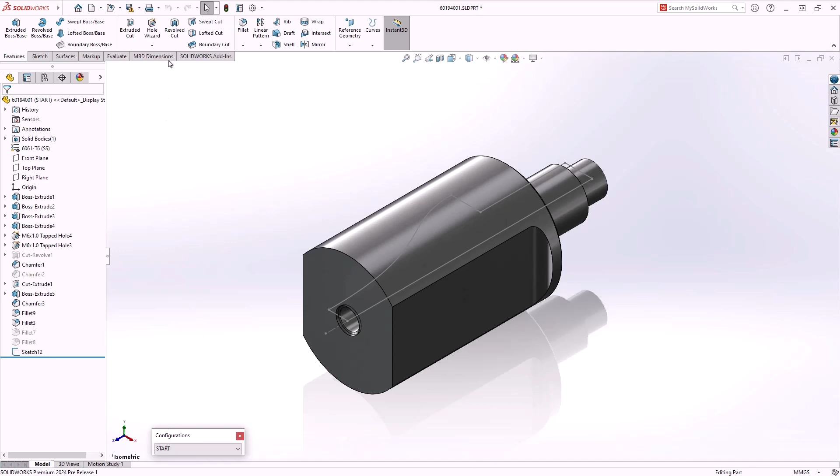Next up in SOLIDWORKS 2024 is a new option in the revolved cut command. We now have the ability to flip side to cut, just like we do in the extrude cut command. Normally this cut would core out the interior of this component, but with the flip side to cut, it cuts the exterior, giving you a lot more flexibility with your designs.

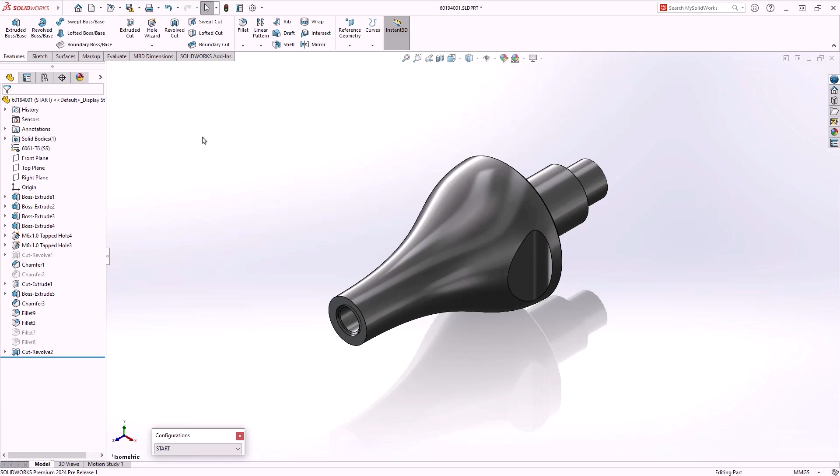On a part like this, we might need to know the sort of bar stock required for manufacturing. So to do that, I'll go to Reference Geometry and choose Bounding Box. Now in the past we've had rectangular bounding boxes, but we now have the option to use cylindrical.

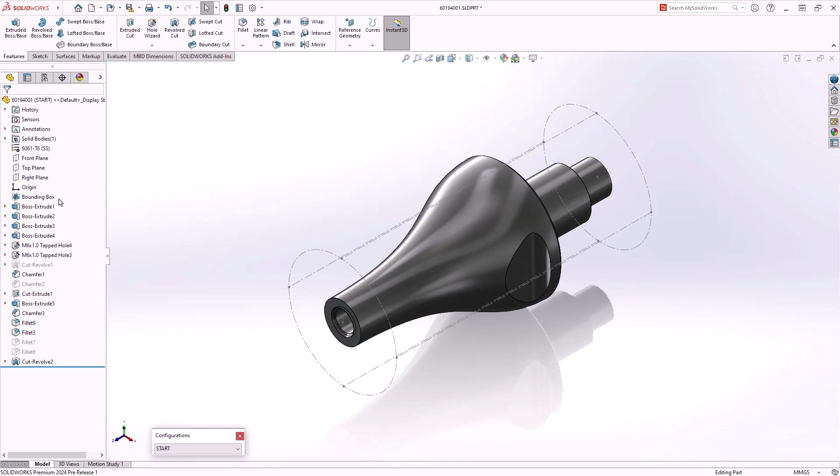Currently this best fit option is based off of the rectangular option, and so it doesn't give us the best fit that we're expecting for this particular component. But that's not a problem, because we can choose a custom plane and specify the direction that we like for this particular bounding box. Right click and we'll confirm that, and you can see this bounding box here. A great way to add useful manufacturing information to your model.

Let's continue on with some patterning and surfacing enhancements. We'll select this component and open it. We have an idea for lightening this component using these triangular cutouts, but of course we need to first pattern them. I'll start by selecting the front plane to give them my pattern direction and then choose linear pattern.

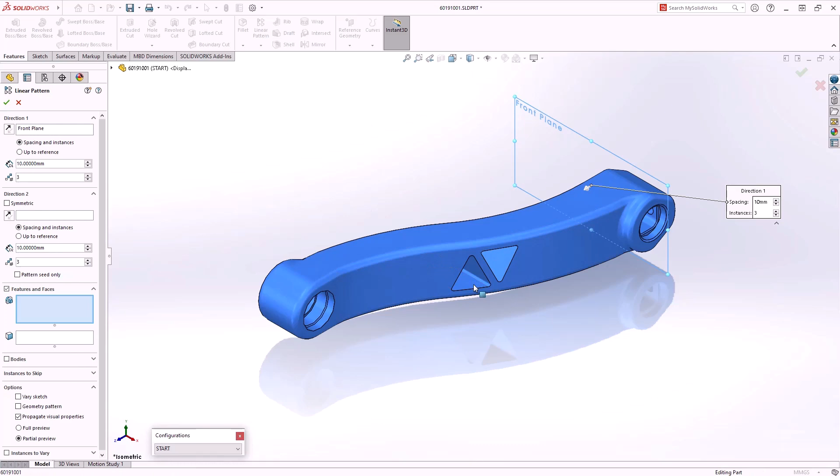At this point we want to select the interior face of that cut and then go to the right view so we can see what it looks like. Let's use a dimension of 22.5 and 3 instances.

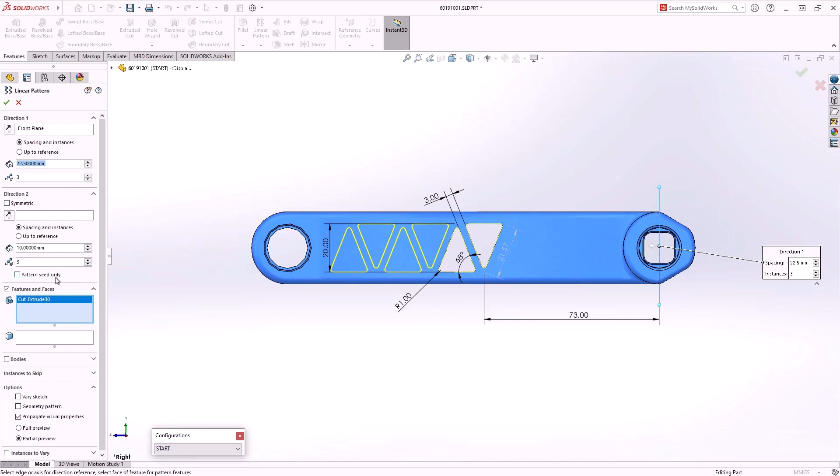New in 2024 is the option for symmetric linear pattern, so we no longer have to use this pattern seed and specify the exact same options in both fields. We can simply use symmetric patterning, and as you can see the pattern is now symmetric. A bit of a time saver if you are using patterns often.

Next, let's have a look at an improvement in surfacing. We have a new option in the Untrim Surface tool, but first we need to do a copy surface, so I'll use the Offset Surface command. Using the down arrow, I will set that to 0 and select this face and click to confirm. Now I have a copy of that surface.

This part is probably going to be injection molded, and we might want to be able to capture these shut-off surfaces for these triangles that go through the whole part. Previously this was relatively difficult, but now in SOLIDWORKS 2024, simply just using the Untrim Surface option and specifying Exclude Parent Surface, it will now give me those interior faces.

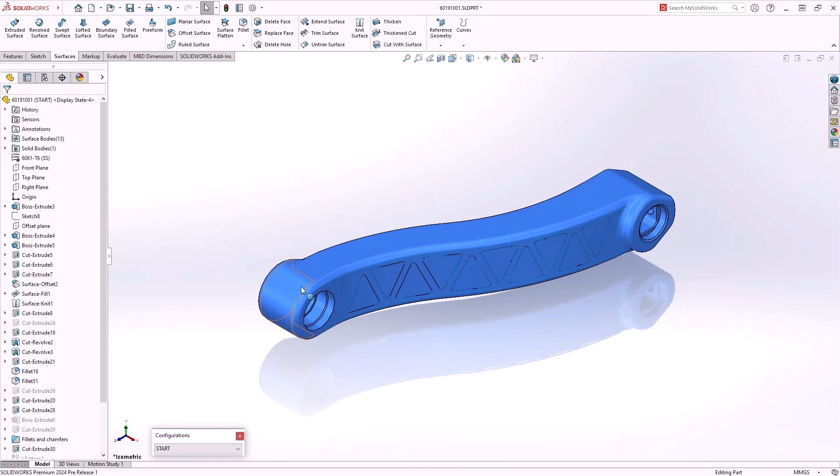I can hover over the component, use Tab to hide the solid body and the surface body, and we can see that I only have the shut-off surfaces that I require.

Let's take a look at some enhancements to sketching as well as the hole wizard. Selecting this component and opening it, let's modify this sketch and add some detail to it. What I want to show here is just a quick sketch addition. Just adding this rectangle, and then I'll simply select one of the lines.

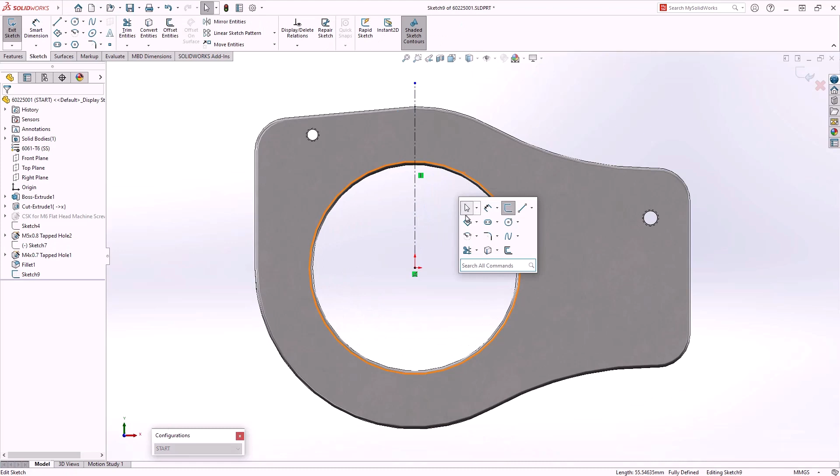As I select it, you'll notice that there is a grey dimension popped up, which I can select and type in a dimension. Very quick and easy. It doesn't only work for individual entities, you can also select multiples.

Let's select the center line, then Control select this line here, and now I have an angle dimension between these two, but it doesn't interfere with any of the previous existing sketch options, such as the pop-up in context toolbar where I can add an equals relation.

A great new option there for dimension preview.

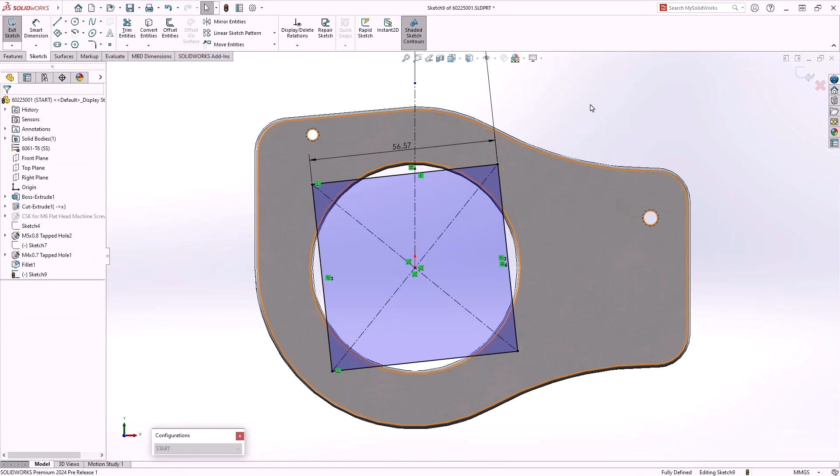Now let's take a look at an update in Hole Wizard. New in 2024 is the ability to use an existing 2D sketch for the placement of holes. Once we've selected the hole type, selecting this option allows me to select the sketch, and you'll notice that it doesn't only allow sketch points, but allows the endpoints of lines as well.

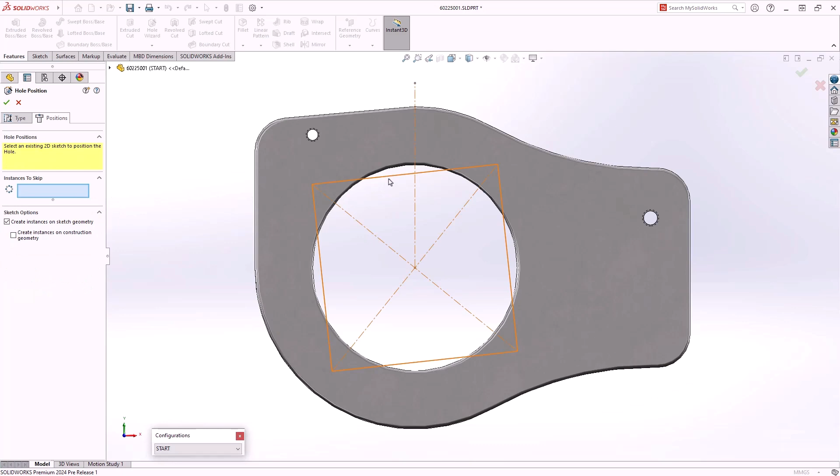I can choose to create instances on construction geometry or uncheck the new option completely. Let's leave it on for now, but in this case I only needed 3 bolt holes for this pattern. So let's choose another new option, instances to skip. Just deselect that particular instance and then confirm.

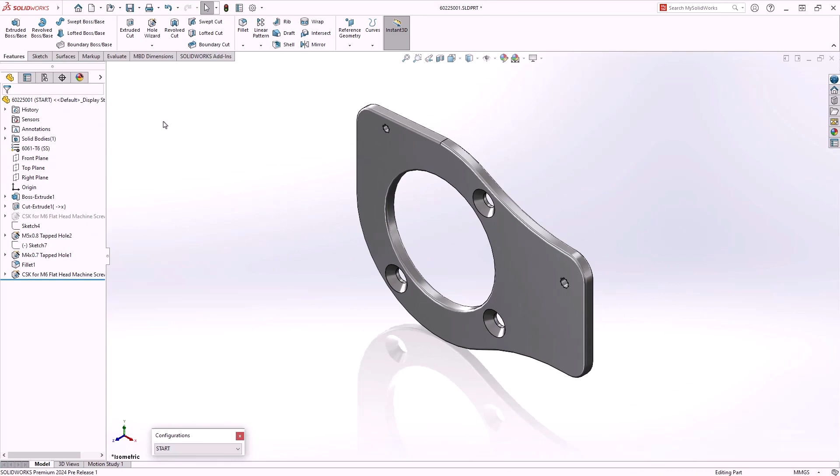Finally, let's talk about another enhancement to SOLIDWORKS 2024, which is the ability to make a multi-body part out of an assembly. In this example, we need to be able to create a fixture or jig for welding this assembly together. But because this assembly is weight sensitive, we also want to have a really precise understanding of the final weight and whether there are going to be any interferences between any of the welds and the jig or fixture.

Historically, we could do some of this inside the assembly, but we can't do an actual physical body weld with a fillet bead at assembly level, although we could do some assembly features like cuts. So we wouldn't be able to get the actual true weight of the completed welded assembly. It's also not as easy to create jigs in this mode either.

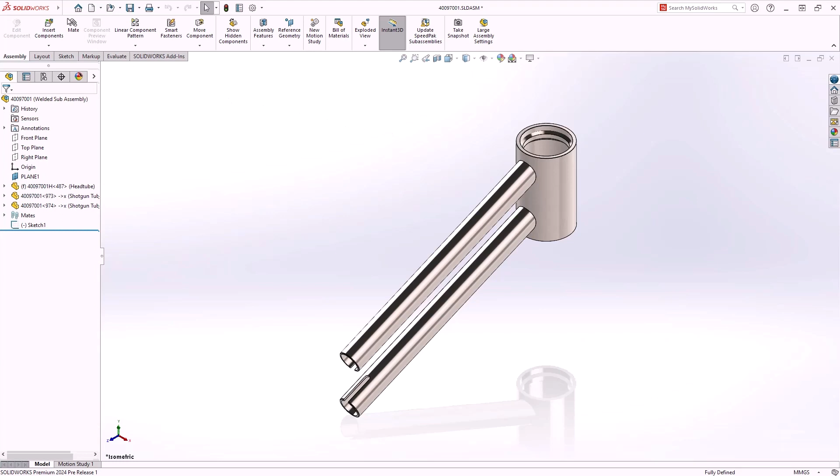Optionally, we could save this assembly as a part, but that breaks the connection to the assembly and also just creates imported geometry. So in 2024, we have an option to make a multi-body part. With this new option, we can carry over information like surface and solid bodies, as well as axes, planes and coordinate systems for the assembly and the part material.

You can choose to break the link to the original assembly if you like, or maintain it. Now that we've saved the multi-body part, we can start creating our jig or fixture, but before we do that, let's look at the feature tree.

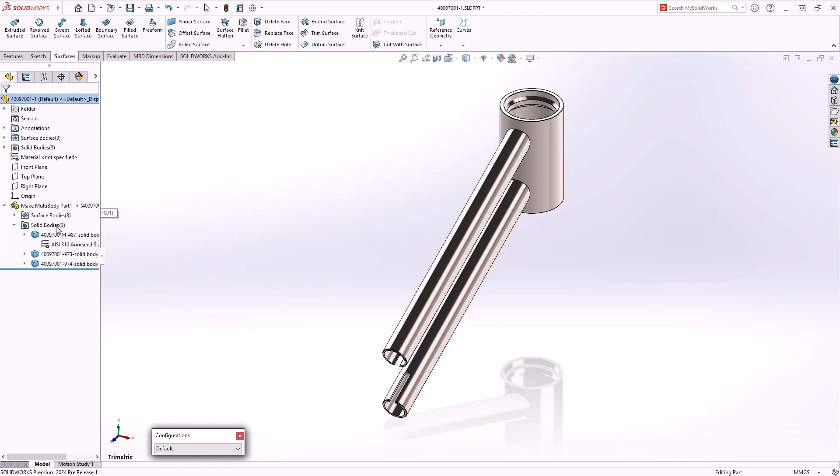On our Make Multibody part, you can see that we have surface bodies and solid bodies brought across, and each of them has their own material shown here in the tree. Let's show the surface bodies and hide the solid bodies. We'll just trim these surfaces using a mutual trim and then thicken the surface. Let's go with 3mm thickness.

I'll just show all the bodies and show the fixture, just to highlight that this is in fact associative. I can move the assembly around here and update the new part to see that not only does the part update, but also the fixture around it.

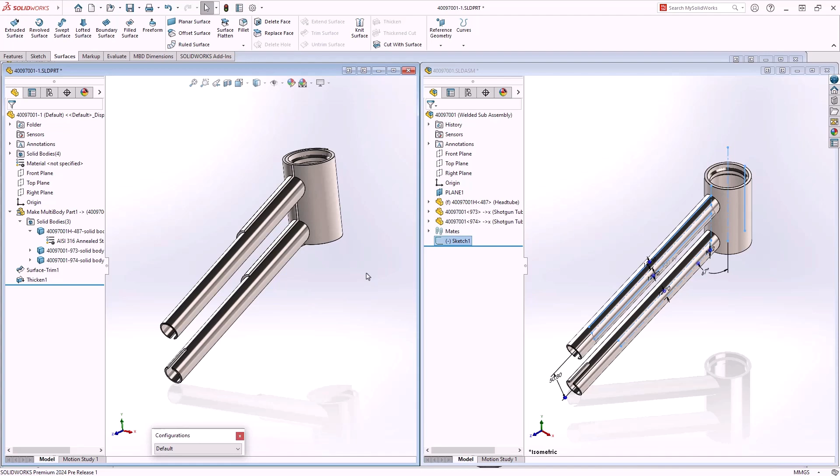Another ability we have in the part environment is that we can create material rather than just removing it. So if I wanted to do a fillet bead, we can do that. Just select one face, right mouse button to move the face set selection over to the second one, and then select the second face set and right click to confirm. Enter will repeat the last command and just repeat the steps.

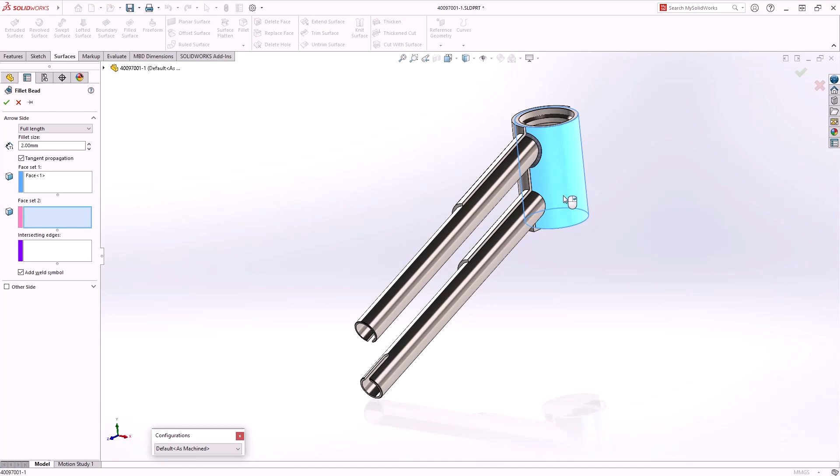Because those are actual solid bodies, we can see them in the cut list folder. We can even apply material to them, again making sure that we have a very accurate weight for our assembly.

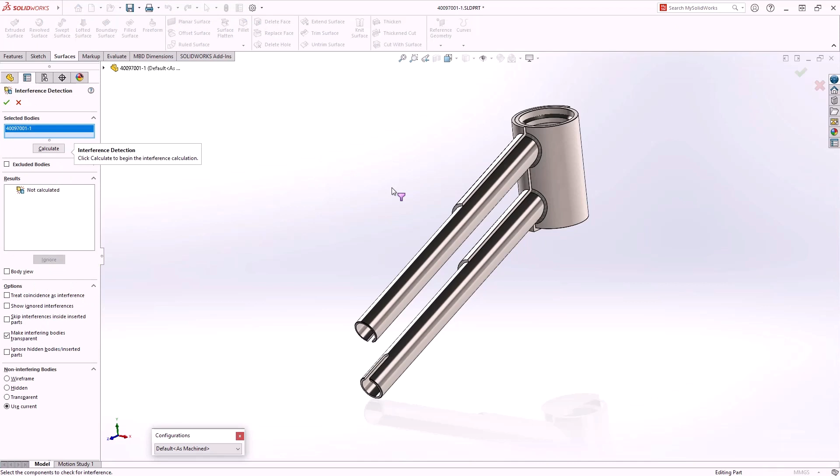Something else that we might want to do is try an interference detection, which we are able to do in part environment as well. We know that we're going to have an interference between the fixture and the weld bead that we just applied, but that doesn't matter too much as we can quickly solve the issue.

Just hide these bodies and then we can add a chamfer to this edge. A 2.5mm 33° chamfer should be enough clearance. Let's show our components again and we'll run that interference detection one more time.

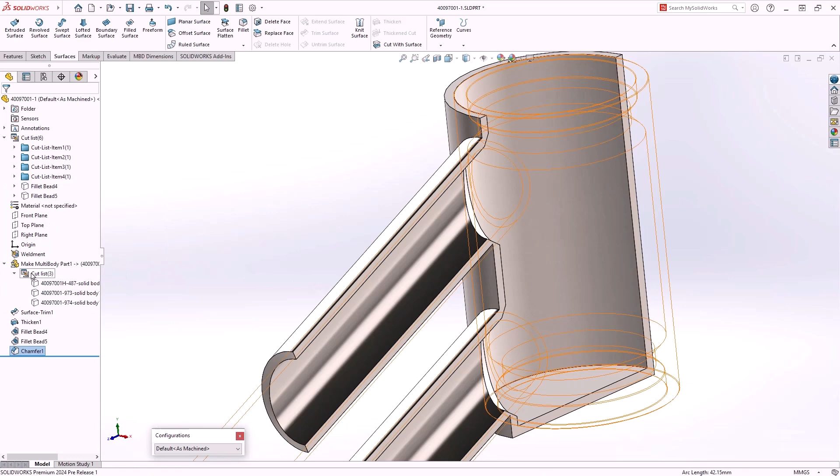No interferences. A great new option for SOLIDWORKS 2024.

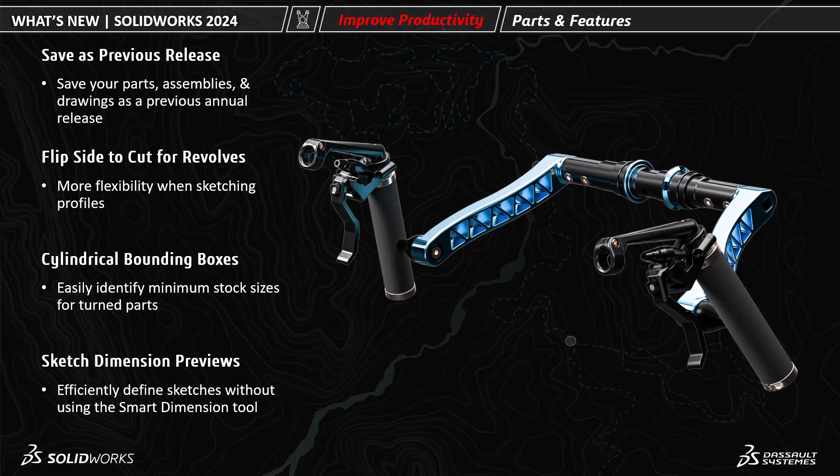Firstly, we saw the new Save As Previous Release functionality. Then we had a look at how we can flip the side to cut within the revolve command, and we followed that up with the new cylindrical bounding box option. Next we saw how we can use the sketch dimension previews and how the Hole Wizard will now use existing sketch entities for positioning, along with a new ability to skip instances. We then looked at symmetrical linear patterns, some updates to surfacing, and finished off with how we can make a multi-body part from an assembly.